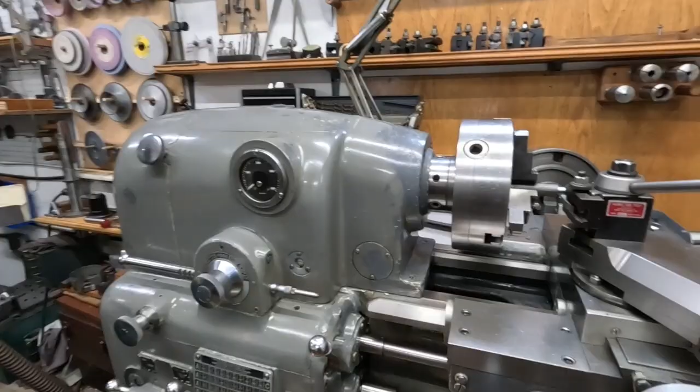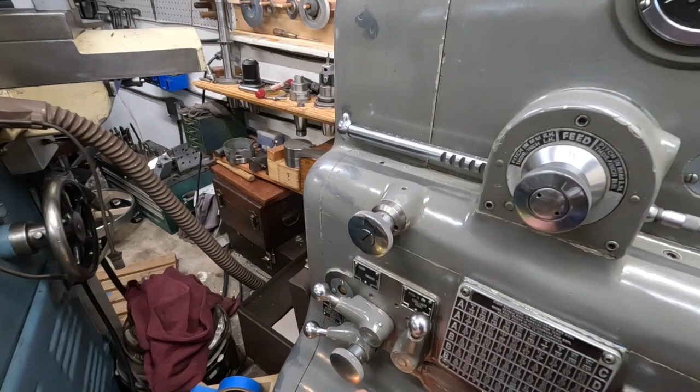So I'm going to warm it up. I've got the tubes warmed up, I've got the control on, and I put a dab of paint on the speed knob here because it can be a really dangerous situation. There's no markings on it at all, and you can throw a part out of the machine if it's all the way to the right and starts up. It'll reach 4,000 RPMs in 2 seconds. So I put a paint mark on it, and that's about 600 RPM, and it's a soft start.

But I'm going to start it a bit lower, so I'll move it over there and fire it up and see where it is. I've got a heavier chuck on here, so I have to change the speed compensation for what I was doing before. So you can make those kinds of adjustments. I'll move this lever down and the spindle should start. You hear that?

It's a little overcompensated, so I'm going to let it warm up a bit, and I'm going to cut threads. The gearbox is quite complex in here, so I've got it in a coarse feed, and I want it to throw oil everywhere. There's no oil pump in the gearbox, but you can use a coarse feed and get those gears moving, and it'll do the splash lubrication.

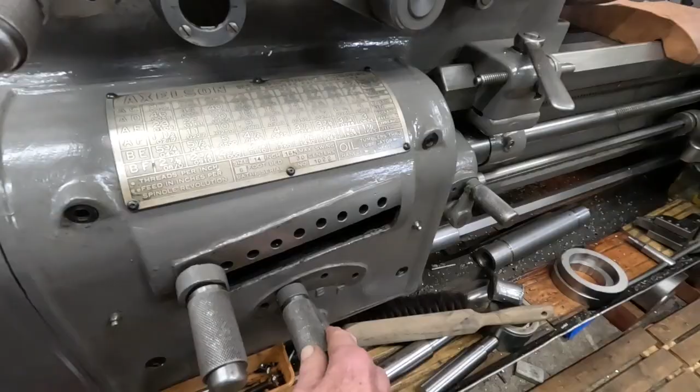Now, one thing you can do on a lathe that a lot of people don't know - this machine is like a standard lathe, but high precision. So on standard lathes, they've got this lower shifting here. This one has D, E, F, and you can shift this lever with the machine running, and it has that same knob in a different location here as C, D, E, so you can change this with the machine running.

You see how fast that's spinning? So I can put it in the coarser feed there and speed it up a little bit, and it'll kick the oil around in there, in that gearbox. It's running at 1,000 RPM there. I'll run it like that for a little bit.

Now I'll hit neutral and it'll stop in 2 seconds - just like that. Okay, I'm going to turn the speed back down a little bit, and I'm going to start it in reverse. To do that, you can lift up on the lever. And it's in reverse, and I'm going to crank it up to 1,000 again.

Okay, I've got the Monarch 8-inch chuck in here, and I'm a little hesitant about running this chuck up to 4,000, but I think 3,000 is fine for it. I've run it at that speed, so we'll see if it goes to 3,000. We're at 1,500... 2,000... 2,500.

That'll go over 3, I'll back her down. Okay, running at 3,000, 8-inch chuck. Okay, I'm going to back it down to 200 RPM.

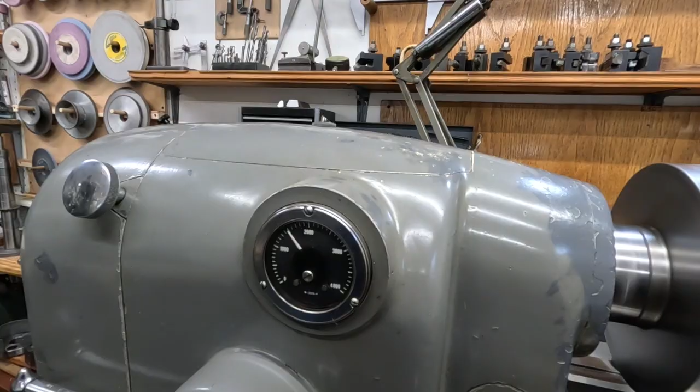With this knob. Now see that? It's surging a little bit.

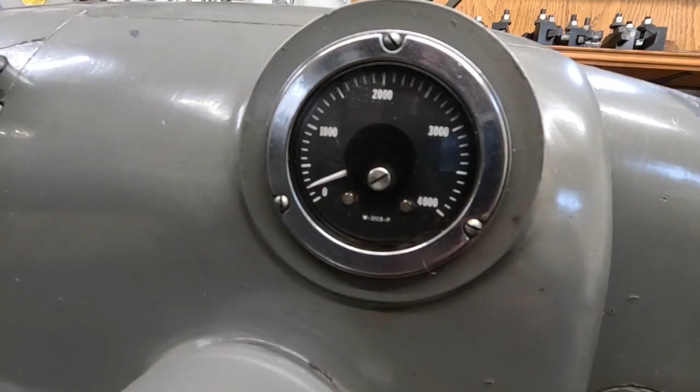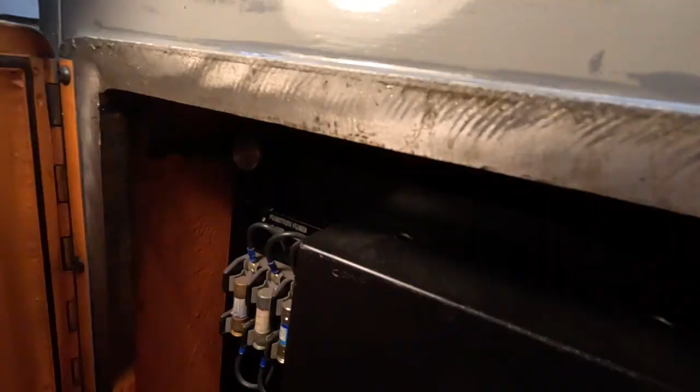Not too bad. So what I'm going to do is turn down the speed compensation in the module here. I've drilled holes. Over here is the top speed, over here is the speed compensation.

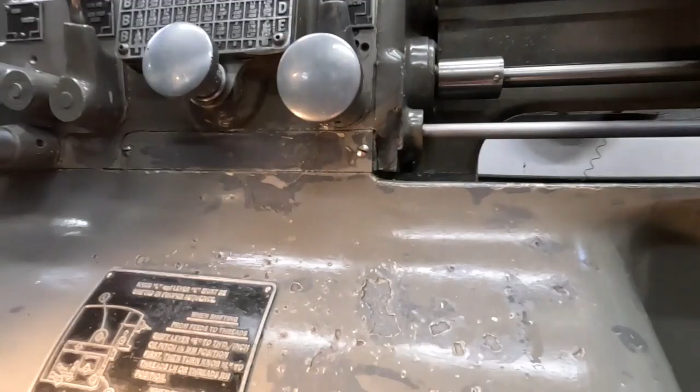And okay, I'm gonna stop it and start it at 200. See? Now to get it to quit doing that, you've got to watch out, don't get shocked by this stuff here.

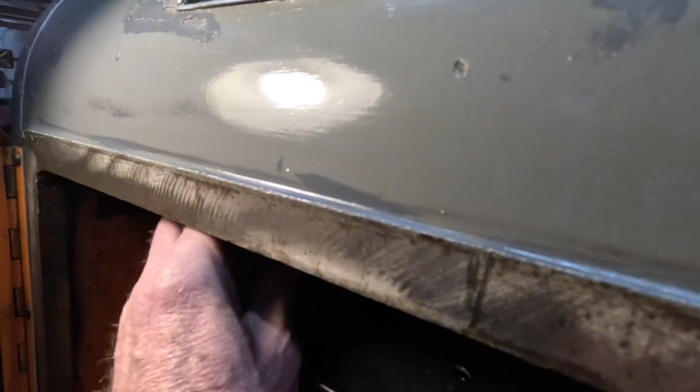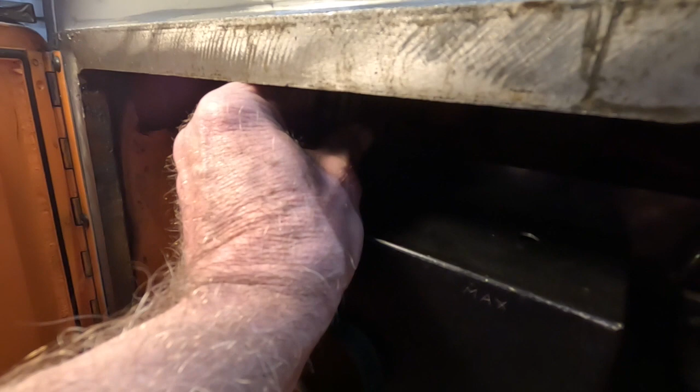I'm going to slip this screwdriver in there, and there's a compensation pot. I got to feel around for the slot, and I'm going to back it off about a 1/16 of a turn.

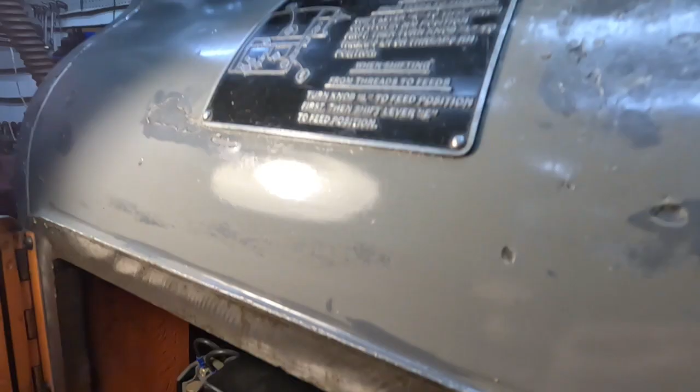Okay, I'm going to try to start it again. That's pretty good, I think that's all it needs. Yep, it'll have to do just a slight bounce, and then it'll settle down without surging. So I got rid of that, and it's going fast enough so I don't need to worry about that pot there. I'll call it good, and set it up to cut a thread here.

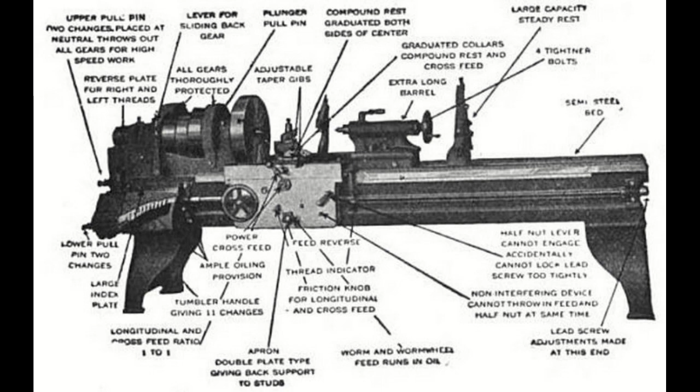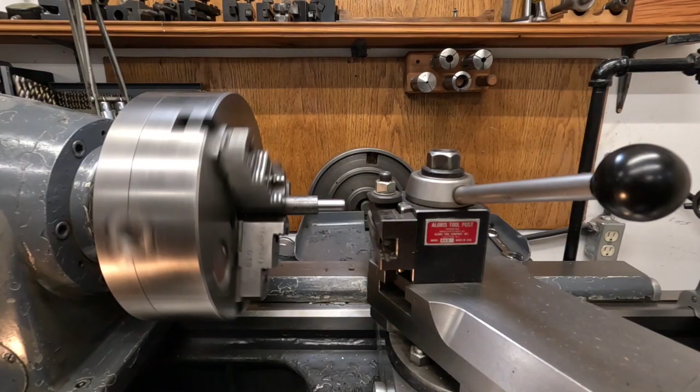Alrighty, I got some threads to cut here, and I'm going to do a test on this piece to make sure I got the spindle compensation taken care of and everything's a go, because I'm going to be doing it on some expensive materials later on.

There we go, put a little ink on there. Now I got it running, we'll run it fairly slow here. And it is running, we're running at 150.

That seems pretty good. So first thing I'm going to do is touch this off, get the compound here at 0, right there, and it is on 29.5 degrees. Now I'm going to take and feed in the cross feed dial.

Now it has a lock. Let's see if I can show that. Might have to get back quite a bit here.

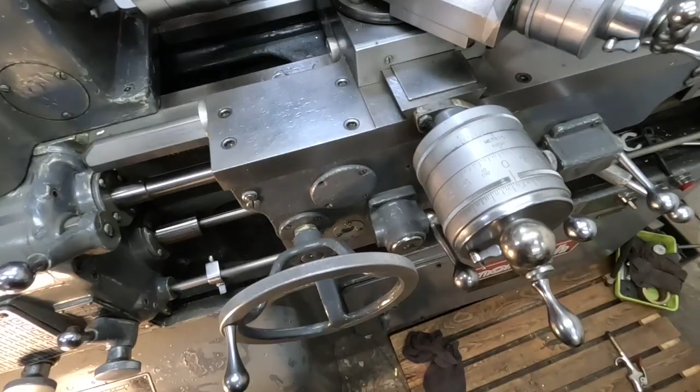I'll take the camera loose so you can see. Okay, I loosened the dial lock, the stop is locked, and I'm going to feed the tool in, make sure that's off until it just touches the work.

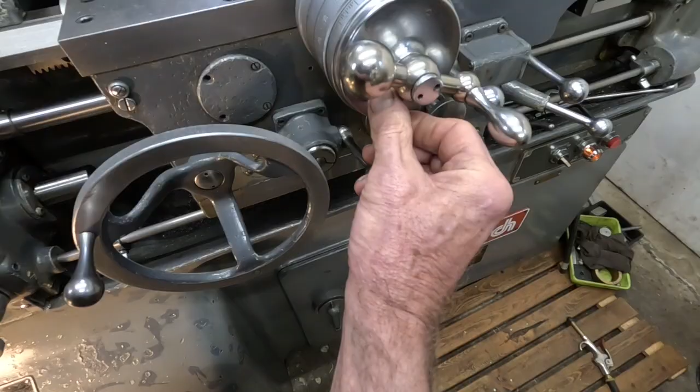Makes a little line, right there, see, it made a little line. Then I'm going to take and lock the dial lock, and so it'll always return there as long as you don't jam it.

And I'll bring it in until it stops, and it should leave a line. See? And the dial stopped at 0. Okay, I'll back it off, and pull it over here. Get this back on the tripod.

Okay, and I think I'll bring the carriage on over to a point to where I want the thread to stop. There's a shoulder there, so that looks pretty good right there.

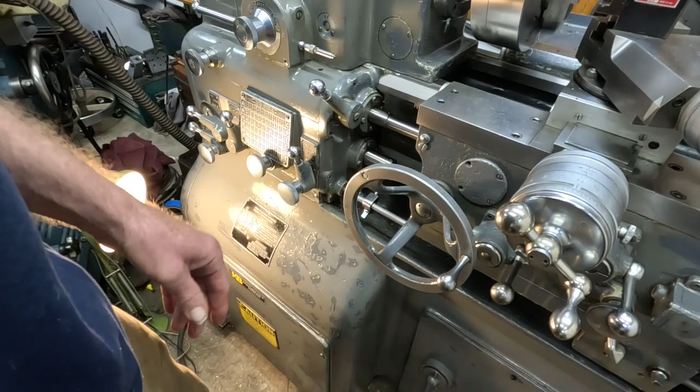Okay, now we'll get the gearbox set. It's a 1/2 inch, we'll do a 1/2 inch 20 threads. Stop the spindle, look at the legend plate.

And the writing is small, second row, very small. Right there, so it's got to be on E8. Okay, E8.

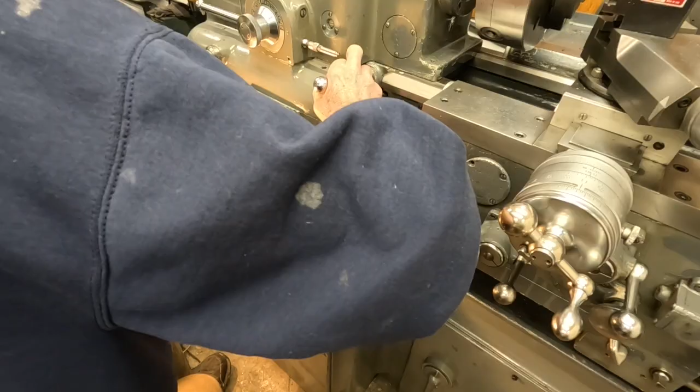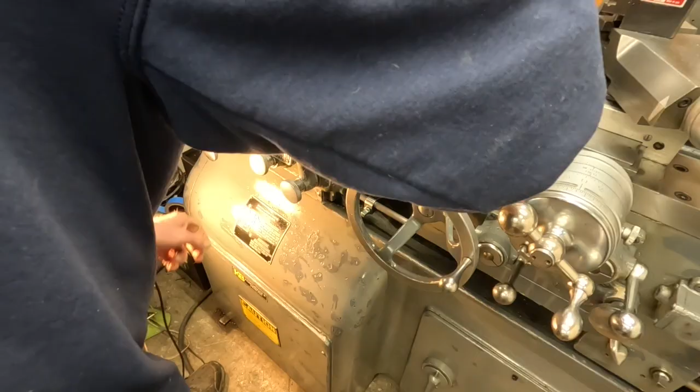And in the A range, we've got an AB knob here. Yep, just in the A range, that's in A. And we are in threads inch, feed threads, got it in threads. We are in back gear, running 150. Now I got to get it in threads here.

Make sure it's locked in. Another move over is metric threads, this is inch metric, so we're in inch threads. And we'll start it up.

No, didn't quite go in. It's like that. Oh, forgot this one. Okay, should be in now.

I got it off feed into threads, inch right hand, that's where it should be. Lead screw should start, and it does. We are in...

E8A, pitch in millimeters, threads, feeds, inch. We're in the right spot.

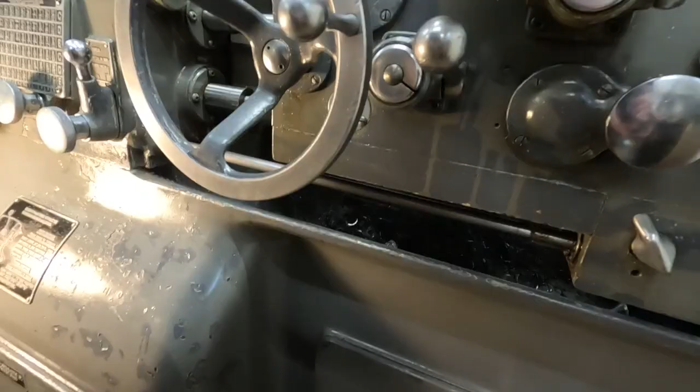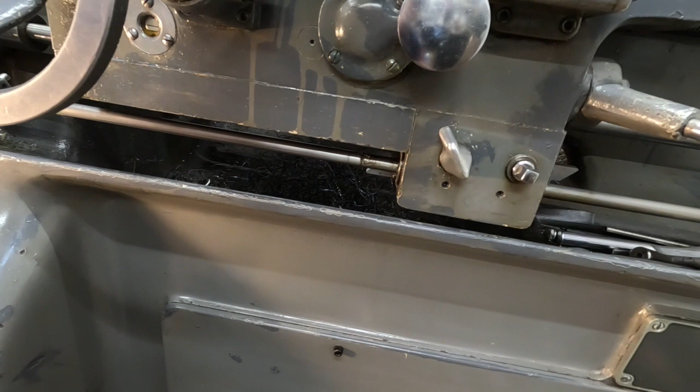Okay, now I'm going to set the automatic stuff here. Hopefully you can see me do that, I have to look through the camera a little bit too. Make sure we can see that. Okay, I got the tool at the end of the thread, and there's these dog stops here. And I'll loosen it, and I'll bring it over.

Then there's a device called the fork. Let me get this camera down low. It's got a fork at both ends here, and you can see this one much easier here.

You'd use that for left-hand threads or a return stop, both. So the fork's on this side. I bring the dog over to just the tip of the fork and lock it.

Then I turn this knob here, which will move the stop rod and shut the lathe off, and return the spindle lever, which you can't see, to neutral, or thereabouts. Okay, now I'm going to lock this.

Okay, now get back up high, get this moved up here. That's a little difficult jockeying this stuff around this machine. There we go.

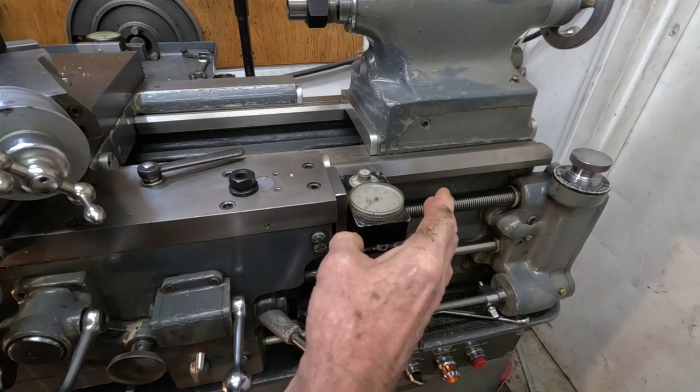Now I'm going to set the travel dial to 0. Just like that. Now I'm going to, with the tool backed off - it's not cooperating real well - I'm going to back the tool off.

Then I'm going to move the carriage on over. I'm going to start the machine, get the carriage in neutral. Looking pretty good, I'm going to start it. Now I'm going to engage the thread dial on a number I can remember, and that'll be like number 1. There it goes. Now it should stop automatically.

Okay, I'll take this loose and we'll see where we stopped. Stopped in a good place. It's away from the shoulder. You can move it closer to the shoulder. We'll take a look at the travel dial. It over-traveled, or rather under-traveled, just about 50 thousandths.

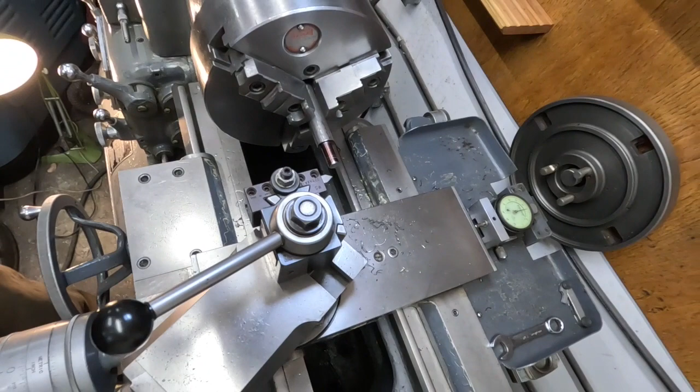Okay, now I take in, bring the feed dial to its stop. Feed in, let's feed in 30 thousandths on the dial for a cut. Let's see if I can clamp this stuff. Okay, like I say, this is a little bit difficult. Now I put a little bit of lube on there, that wax lube.

There's a lot of it on there. And we'll take the first cut. So I got the cross feed in all the way to the stop, got the cut dialed in, and as soon as the machine shuts off I'm going to back the tool off. So I'm cutting a thread without a stop groove.

Alrighty, here we go. It's cutting, and I backed it off. Now we put the lathe in reverse to return to the start of the thread.

Now you do this with metric threads and threads that you want to cut to the highest precision, because it eliminates the error of using the half nuts, called camming-in error of the half nuts. This is totally eliminated, like that is done on a Hardinge.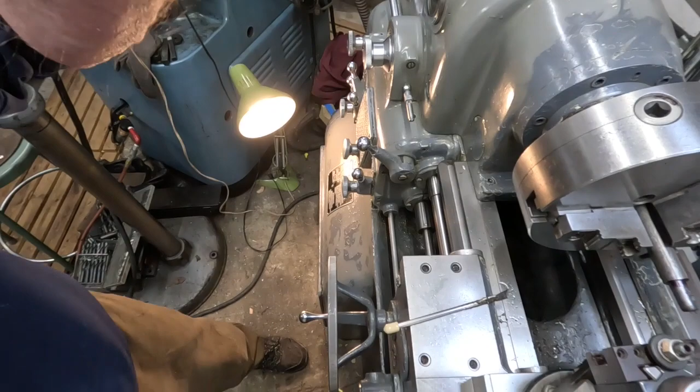Okay, I'm going to make a final finish cut on this, and this is how I'm going to do it. We'll look straight down onto the dial here. Now I'm going to bring it back to the stop, but instead of using the compound, I'm going to leave it where it is. And you see this outer dial right here?

I'm going to loosen the lock, and I'm going by this outer dial. I'm going to feed it in 3 thousandths if I can. Make sure it's unlocked fully. Right about there. Now I've got to lock it again.

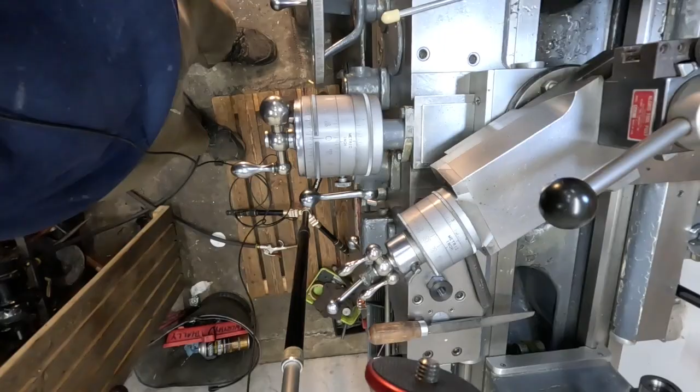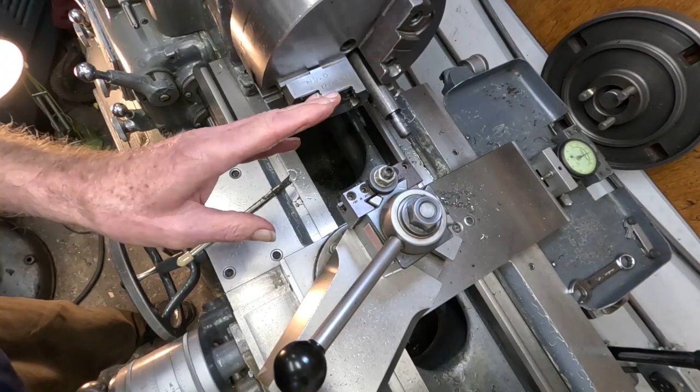Okay, now it's going to feed that tool straight in, and it'll cut both sides, both flanks. Now if you're feeding in just with the compound, it's cutting that left-hand flank, and it kind of leaves the right-hand flank choppy. Now this will finish the thread.

Everything looks good. Whoop, didn't want to do that. We should be okay. Here we go. I moved that top dial, but that's okay. Okay, return it.

All right, let's see how it fits. Just perfect. It rolls on without bind. A little bit of a chip there, I see. Rolls on without bind and no shake, slight shake. Very good fit though.

Yeah, got a little bit of a burr there, I didn't get with the file. Okay, see that thread coming all the way through. And there's no shake to it. And that's how you want to fit specialty nuts, hydraulic nuts. And what I'm going to be making for someone is a puller, and I want the threads real tight on a puller, it goes onto a threaded section.

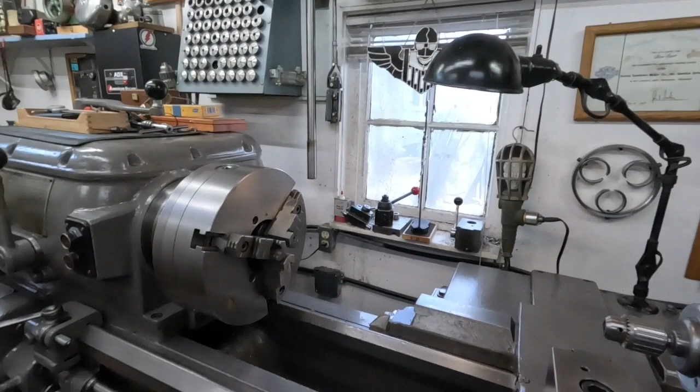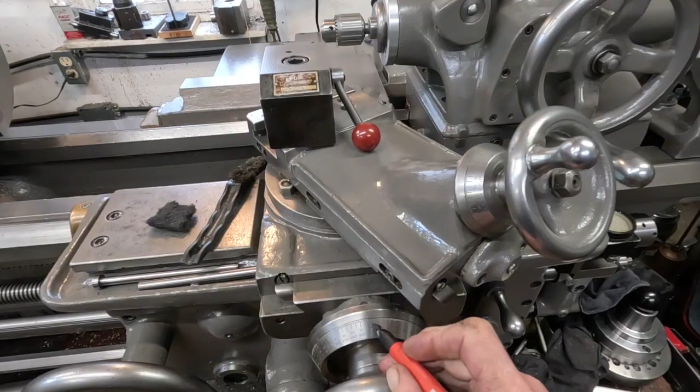Okay, I thought I better throw this in. Now, this Axelson has a nice reversing spindle, so you can leave the half nuts locked in and cut metric threads or higher precision standard threads by leaving the half nuts in. But there's no dial stop like the Monarch 10EE. So, plus the dials are plain steel and they're hard to read, so I just take a marker and mark 0.

Okay, and then instead of using the compound to feed in for the last cuts, I just watch where the 0 is and then just move it manually about 0.003 at a time until I get the perfect thread. I always make a chip.

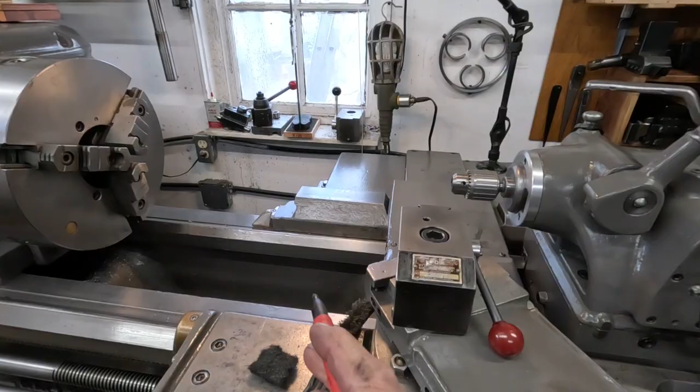And the reason I do that again is when you're feeding in with the compound at 29.5, 30 degrees or whatever, it's cutting that left-hand flank and kind of tearing the right-hand flank. So the final cuts, if you feed it straight in and your tool is sharp, it'll shave both flanks and you'll get a lot cleaner, more accurate thread. Okay, I'll be back soon enough.